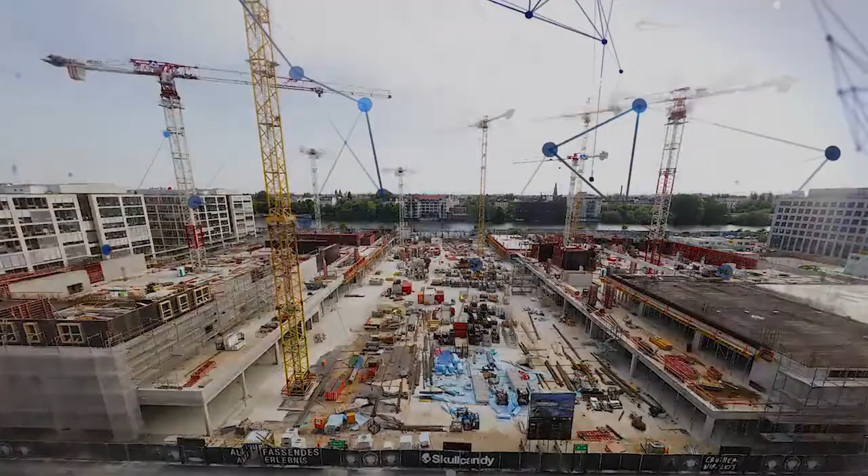From single-family residential housing to large commercial properties, building construction technology and methods have changed very little over the past 100 years. About 95% of the current Philippines market is cast in situ construction. This antiquated model of labour-intensive on-site construction is under ever-increasing time, budget and liability pressures. The time, cost and difficulty of building a cast in situ concrete structure makes precast concrete an obvious choice.

6D Buildtech offers two basic strategies for building superstructures. First is a load-bearing wall system that primarily targets residential building from villas to 15-storey mid-rise blocks. Second is a space frame solution that provides large open spaces driven by 9-metre column spacings and is ideal for office and commercial spaces. The space frame system is the only precast concrete system in the world that can be used for construction of a 100-storey building.

When designing and building with precast concrete, the first focus should be on the connections. It does not require great skill to precast a concrete wall, floor or frame element. The challenge lies in effectively connecting the parts in a way that maximises economy and performance. The way in which the parts are connected has a significant impact on the cost and speed of construction, as well as on the performance of the structure under superimposed gravity, wind, seismic and thermal loads.

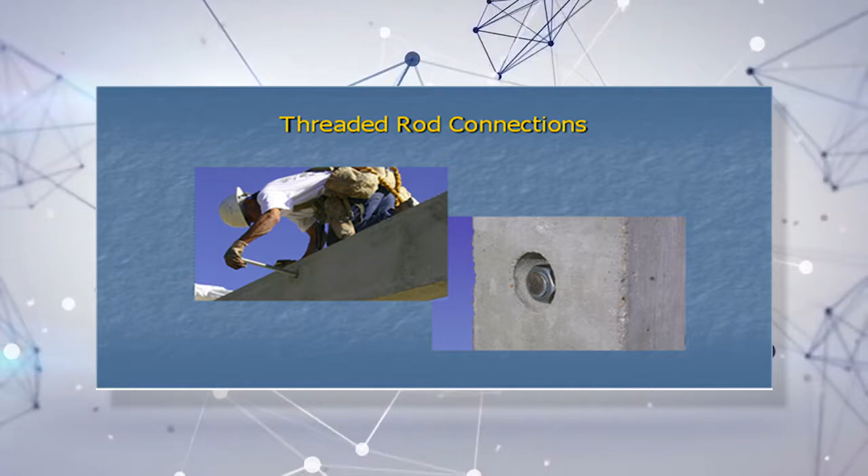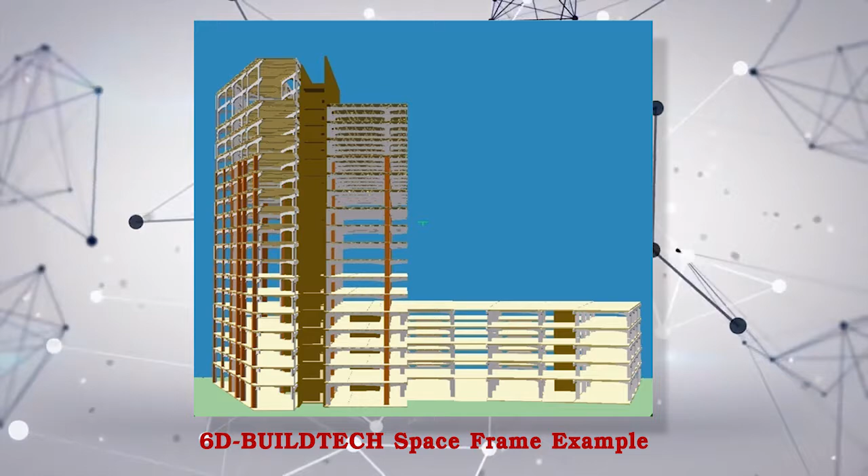The most basic 6D Buildtech space frame system includes precast concrete frame and floor elements with two major innovations. First, the space frame system uses precast concrete elements with bolted connectivity similar to that employed in steel building construction. Hardened threaded rods are used to connect the elements without the use of welded embed plates, which have a high fatigue and failure rate. The bolts pass completely through the precast elements.

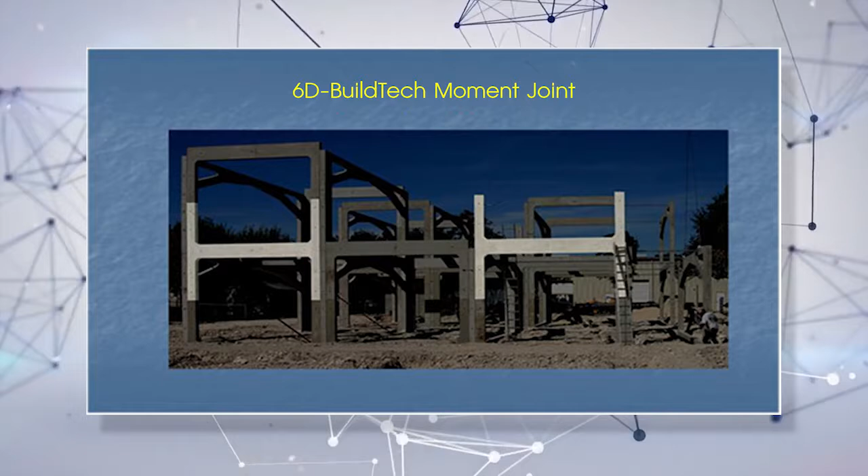Buildtech space frame replaces the pin joint in conventional precast using a moment joint. The overlap of the spacer element from mid-floor height on the lower floor to mid-floor height on the floor above transforms the joint into a rigid joint, giving the structure the stiffness to carry lateral loads imposed on the structure.

Structures built employing this system utilise highly configurable blocks that include the framework, roofs, floors and exterior walls. Structures can be built in time frames not achievable using conventional construction methods. The design and manufacturing of the blocks make them aesthetically appealing, with symmetric angles, terraces, cantilever porches, etc., more durable than conventional buildings and less expensive to maintain and insure.

Buildtech's space frame system offers options for readily accessible chase areas for mechanical, electric and plumbing, or MEP. Because all dimensions are modular, components of interior construction, for example partitions, plumbing runs, HVAC units and duct runs, etc., can all be largely prefabricated for finish out of space. When assembled, Buildtech delivers a stronger building with fewer maintenance issues.

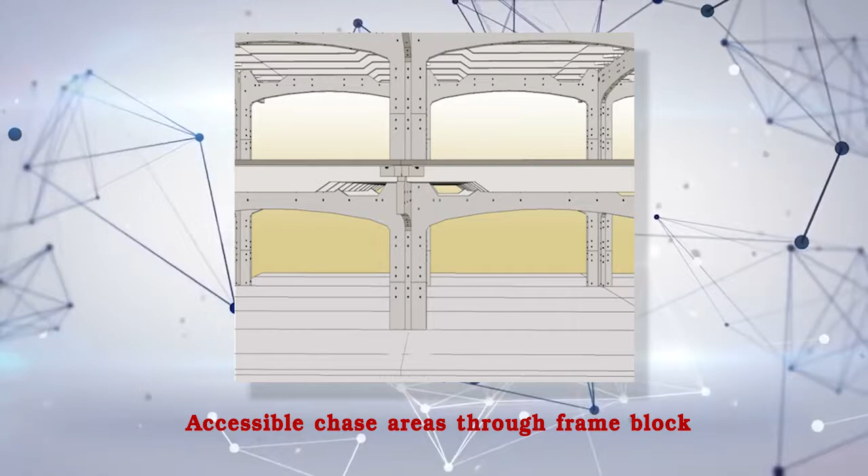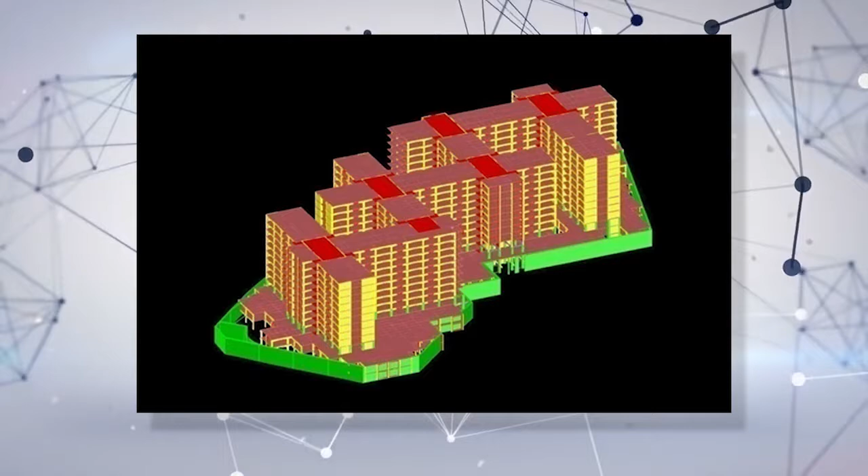6D Buildtech space frame advantages. 1. Precast concrete parts with the connectivity of steel. 2. Bolted semi-rigid moment joints versus pin joints used in conventional precast systems. 3. 10+% less materials, concrete and steel. 4. 50 to 70% less labour for space frame. 5. Fast assembly. 6. Eliminates waste. 7. Environmentally compliant and sustainable. 8. Flexible from villas to towers.

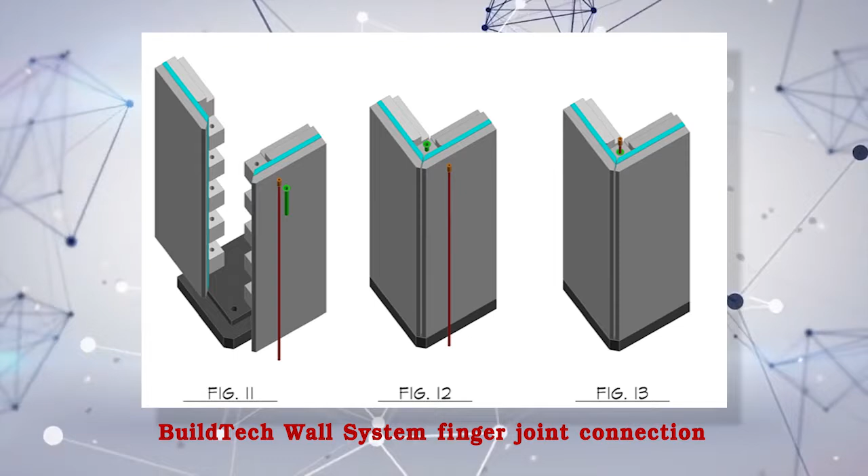The Buildtech wall system employs a finger joint pattern that enables the construction of joints to connect to intersecting wall blocks at the ends or along the length of a wall. A pair of walls is immediately stable once a joining pin has been installed. Door and window frames can be installed in the factory. Electrical conduit and other service features such as plumbing and air conditioning routing can be cast into the basic wall and floor panel components.

The BuildTech Wall System offers continuous insulation of the building envelope. This continuous insulation eliminates thermal bridges present in other insulated precast wall systems on the market.

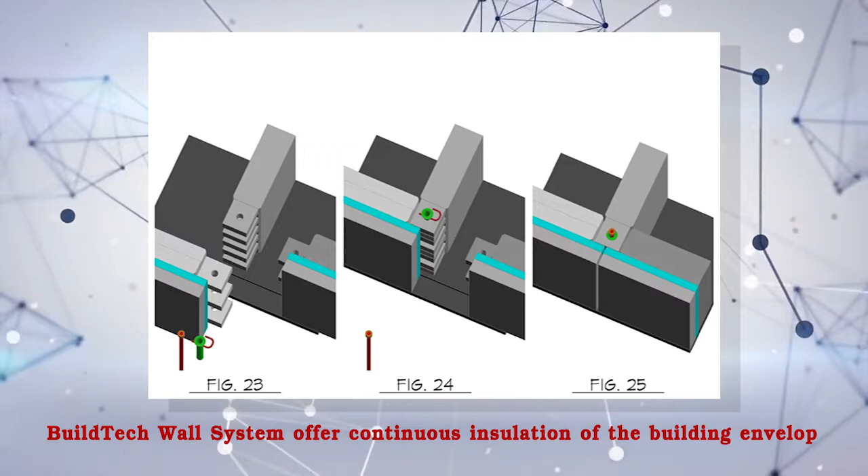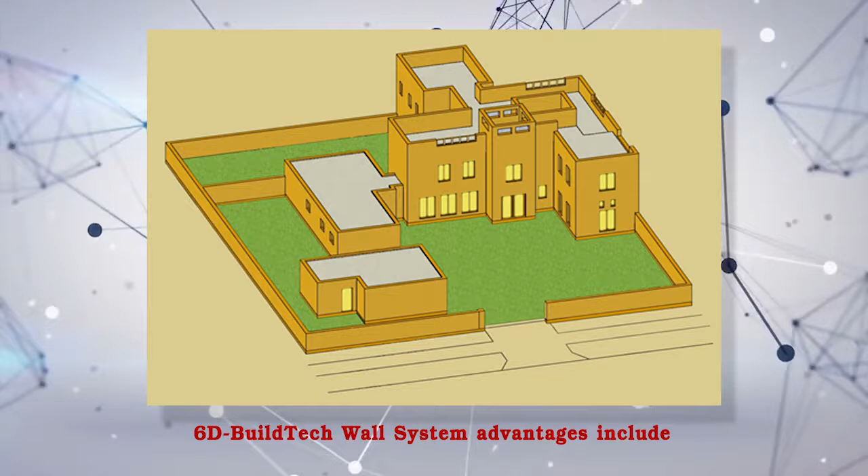6D-BuildTech Wall System advantages include finger joint stability during assembly, continuous insulation, less materials, concrete and steel, 10 to 15% cost savings, 50 to 70% less labour, fast assembly, 80% faster than conventional construction, eliminates shoring and drastically reduces on-site formwork, excellent buildability, speed, safety and cleanliness, eliminates waste, flexible, villas and condos up to 15 stories, MEP conduits can be added at manufacturing stage, seismic zone performance, resists typhoon wind loads.